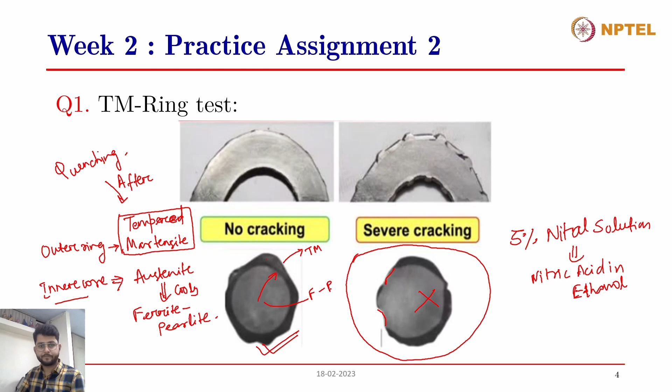While the rebar on the left has a completely circular cross section of the ferrite pearlite core, and the tempered martensite ring outside the ferrite pearlite core is more or less uniform. So this is a good rebar, and this is what essentially is done by the quality assessment.

Now, apart from this, before the TM ring test, another test is done - that is the bending test.

So both of these tests have to be done in combination in order to check the rebar's quality. In the bending test, shown in the top part of this picture, the rebar is bent, and as you can see in the left rebar, due to the bending process, there are no surface cracks at the tensile, or longitudinally stressed location, at the topmost fibers. There is no surface cracking due to the bending.

While in this second case of rebars, there are surface cracks appearing due to the bending, and these surface cracks will promote the corrosion process. So this severe cracking that is happening in the rebar will also let us know about the quality of the rebar.

So, to avoid any kind of corrosion, we know that there should be uniformity all around the rebar, and there should not be any inhomogeneity present on the surface of the rebar, so as to make a potential difference large enough to promote the corrosion process. So if it is uniform throughout, like in this case, then it is good quality rebar, and it will protect the structure from corrosion.

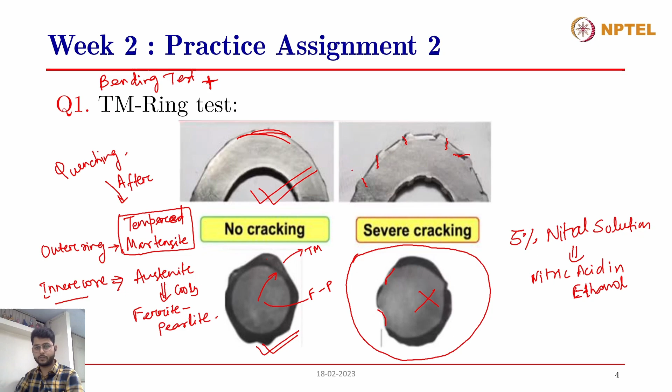So the answer to this question was, as rightly pointed out by Dr. Satish, the distribution of the tempered martensite and ferrite-pearlite core phases in the cross-section of steel can be checked by the TM ring test. The resistance against bending-induced surface cracking of the steel can also be checked. This has to be done after the bending test is done.

Bending test plus TM ring test. And effectively, the corrosion resistance of the steel is also assessed qualitatively by this test. It has nothing to do with the bond strength of the steel, and nothing to do with the tensile strength of the steel.

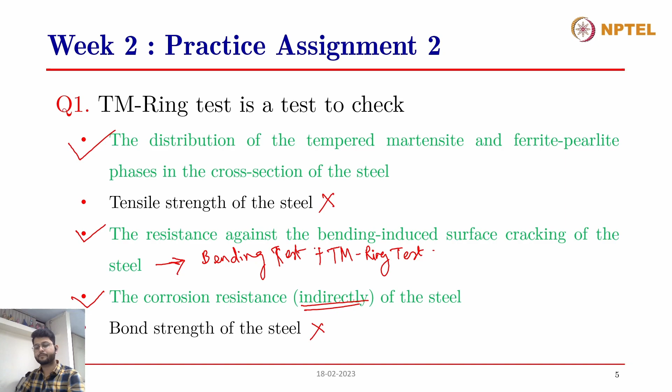Can somebody answer this question? I know the answer, but somebody else should try. Okay, Arvind, Manisha, Arvind has joined. Let them. Yes, Arvind or Manisha. If any of you want to answer this question, please raise your hands. In fact, I'll unmute all your mics since there isn't much noise and you're muted. Since nobody else is attempting it, Dr. Satish, go ahead.

First one: they are manufactured by cold working at a temperature below the recrystallization temperature of steel. Then, the twisting process does not increase the corrosion resistance, rather it decreases it. IIT Madras Professor Pillai has done some studies on this, because more energy is involved, and the moment you add more energy, it becomes more prone to corrosion. Third answer: the yield strength of the rebars increases with amount of cold working - yes, it increases, this is also correct. The ductility of rebars increases - no, as the strength increases, ductility comes down. And the last one: cold working results in strain hardening - yes, that's correct, because the process itself is based on strain hardening. Thank you, Dr. Satish.

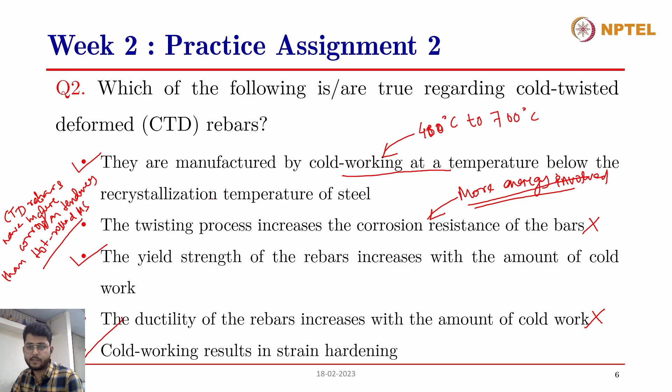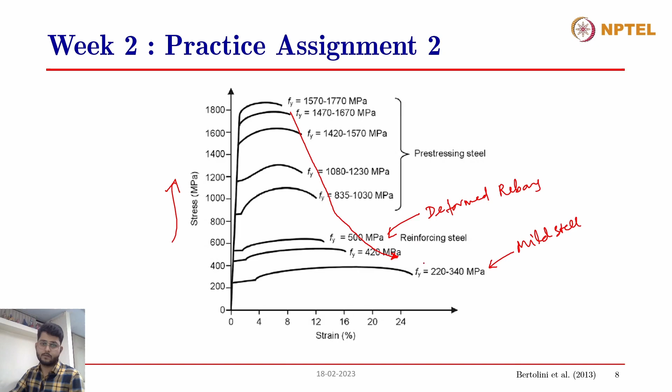Okay, the last statement was cold working results in strain hardening, which is again true. As Dr. Satish has highlighted, the cold working process is done so as to increase the strain hardening phenomena in the steel.

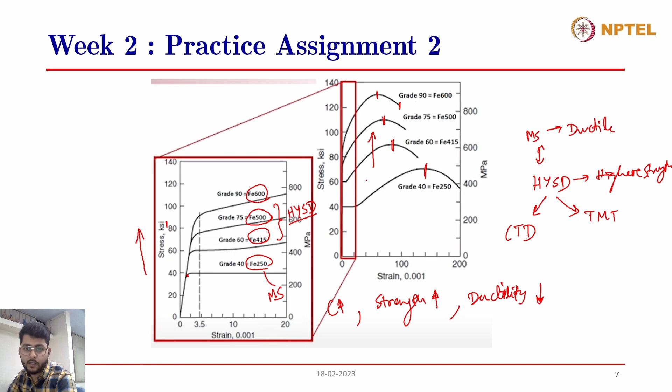As you can see in the case of mild steel, the strain hardening is lesser compared to HYSD in this graph. The slope after the yield plateau has crossed, the slope of the deformation curve of the steel rebar, is steeper in the case of HYSD rebars compared to mild steel. This steeper slope indicates that the strain hardening phenomena takes place in a much more highlighted manner than in the case of mild steel rebars.

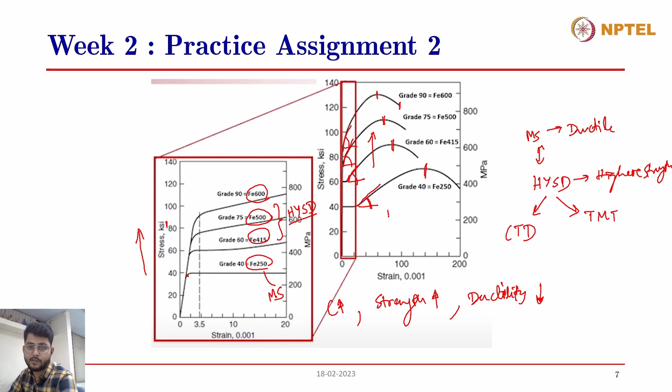All right, so these are the answers to the question. Coming to the third question: as per the lecture, the chloride threshold of bare steel is higher than that of galvanized steel with no surface damage. True or false? Can somebody answer this question? Mr. Ismail Ali Ahamed has joined, I think he can attempt. Okay, well, wait, if somebody wants to answer the question, please raise your hands.

Should I reply? Ismail has unmuted himself. Yeah, do you want to answer, Satish? Better? Yes, yes, better.

The question is: the chloride threshold of bare steel is higher than that of galvanized steel with no surface damage. Is it a true or false statement? The chloride threshold of bare steel is higher than galvanized steel.

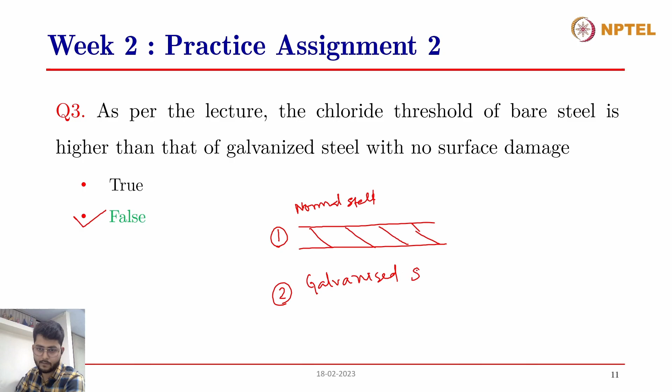So essentially, let's consider one example of this. This is a normal steel, and this is a galvanized steel. In the case of normal steel, it only has a depassivating layer or film around it, which is made up of the initial corrosion products of the steel reinforcement itself, the oxides and hydroxides of iron.

So this is the depassivating film of the reinforcement. Now, in the case of galvanized steel, what is done industrially is that the steel is placed in a zinc bath so as to prepare an alloy of the zinc and the iron from the steel as a coating over the steel surface. So the steel is intact inside, but there is a coating of the zinc-iron alloy over the steel.

And this coating has a higher thickness than that of the depassivating film of the normal steel. And as we know, zinc is more reactive than iron, so even this zinc also produces a depassivating layer around it, which, when it comes in the concrete matrix in contact with the pore solution of the concrete, again produces a depassivating layer around itself.

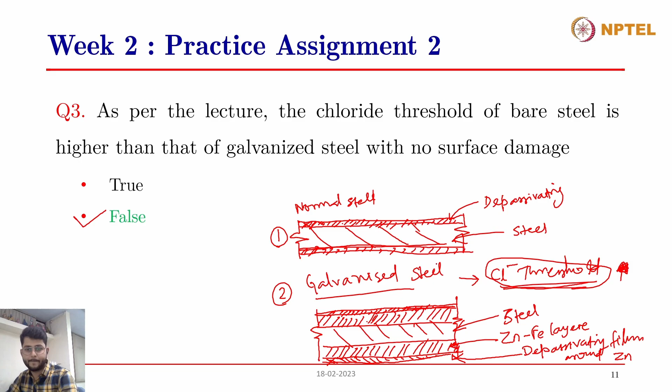All right, moving on to the fourth question. Choose the correct statement regarding galvanized steel rebars. They have high abrasion resistance compared to fusion bonded epoxy coated rebars. The zinc corrosion products are more voluminous than iron or steel corrosion products. The zinc coating can provide some level of galvanic protection even in the case of some scratches on the coating.

And I had also highlighted this in the last slide, even if there is some surface damage. Galvanized steel will corrode at the pH of carbonated concrete, say about 9. Addition of chromates to the coating can prevent hydrogen evolution and enhance the bond strength. Which of these statements are correct?

Can somebody answer this question? I think Mr. Ismail Ali can try. Yes, Dr. Satish. If Ismail wants to answer, you can raise your hand, or I have also allowed your mic. You can unmute yourself and speak.

Correct answer. So this one: galvanized steel will corrode at the pH of carbonated concrete, say about 9. That is an incorrect statement.

Now coming to the first one - they have high abrasion resistance compared to fusion bonded epoxy. Yes, this is correct because fusion bonded epoxy coated bars have sensitivity towards abrasion, so those are poor resistance. Galvanizing provides much better abrasion resistance as seen in practice.

The second one - the corrosion products are more voluminous. Answer is this is incorrect. And why? In case of iron or steel corrosion, there's a tremendous increase in volume, whereas in case of zinc corrosion products, it may be negligible, may not be much.

The third one is zinc coating can provide some level of galvanic protection even in case of some scratches. Yes, even if it is damaged, still it will continue to provide protection, whereas in case of fusion bonded epoxy bars, if you have pinholes, it becomes even more prone to attack. That is a problem with fusion bonded bars, so galvanic protection is better if some damage takes place.

Then the next question is galvanized steel will corrode at pH. No, it will not - normal steel will corrode. In case of GI steel, we have some protection. And then chromates as admixtures can prevent the hydrogen evolution, so that will be helpful. So the last one is also correct.

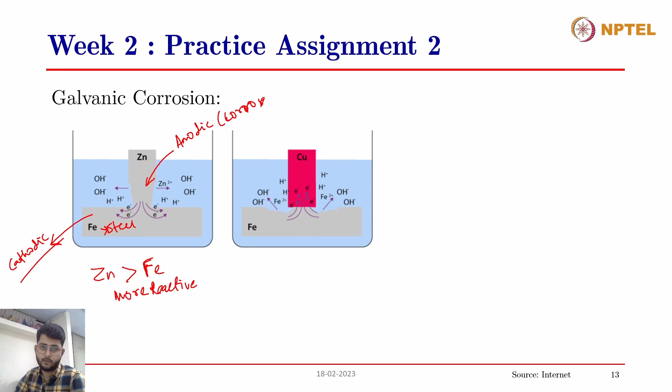It is a sacrificial action. Yes, zinc sacrifices itself in order to protect steel, it sacrifices itself. Right, right, Dr. Satish, thank you.

So this is kind of a sacrificial action, as Dr. Satish mentioned. The zinc gets corroded while the steel is protected, even if there are surface scratches on the steel. Let's say this is the steel, and this is the zinc layer.

If there is a zinc layer and there's a steel, so even if there are surface scratches on the steel, still due to the galvanic protection or this galvanic corrosion process, the zinc will keep on corroding. Even if there is a small amount of zinc present at that location over the steel reinforcement, that zinc will corrode before the steel gets affected. So this is the galvanic protection that is being talked about in this statement.

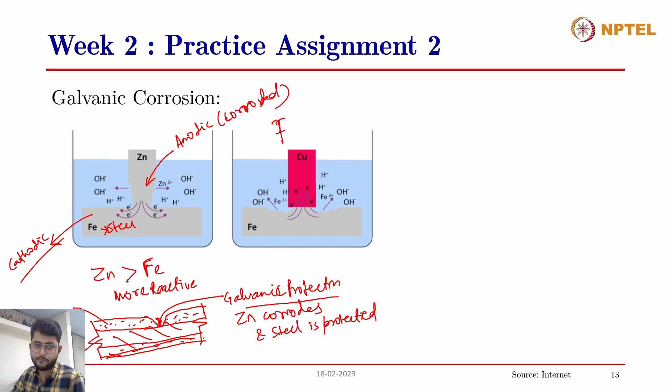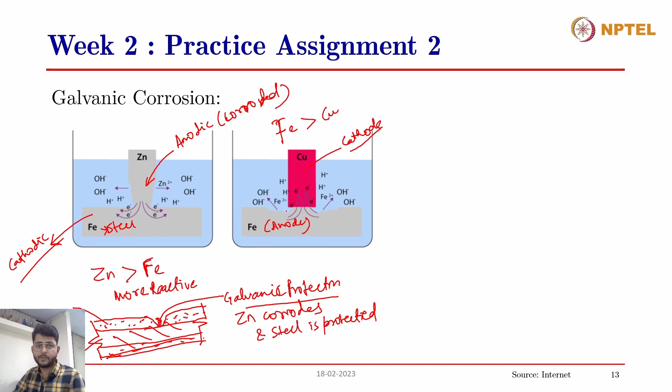Zinc corrodes and steel is protected. Coming to the right hand side image, which shows two different metals, copper and iron. In this case, iron is more reactive than copper, and therefore the iron becomes the anodic site and the copper becomes the cathodic site. Therefore, the copper is protected while the iron gets corroded. This has happened in a real life example in the case of the Statue of Liberty.

In the 1980s, it was investigated that the outside material of the Statue of Liberty, which is provided for aesthetic reasons, is made of copper.

So this is the copper, and the inside material is wrought iron, which provides structural support, acting like a structural steel kind of system. It is integrated with the outside copper covering with the help of these copper saddles.

At these locations, as you can see, the iron gets corroded and deposited while the copper remains intact. Once the iron is corroded beyond acceptable limits, it will affect the structural performance of the statue. So this is the problem of galvanic corrosion in real life structures that you might come across.

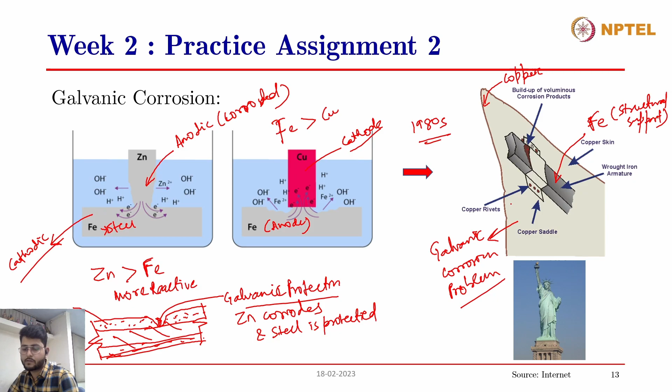So this was regarding galvanic protection. The fourth statement mentions that galvanized steel will corrode at a pH of carbonated concrete, say about 9. This is a wrong statement because, as seen in the lecture, of the passivation process of zinc.

Whenever zinc is present, the galvanized steel rebar is present inside the concrete at a pH of around 12 to 13, the zinc around the steel rebar forms this passivating film, as I have already explained. This passivating film is made of calcium hydrozincate, or CHZ, which reacts with the pore solution and forms this passivating film.

This is the initial corrosion product of the zinc, which acts as a passivating film around the zinc of the galvanized steel rebar. These corrosion products, up to a pH of about 13.3, can form a compact passivating film around the rebar.

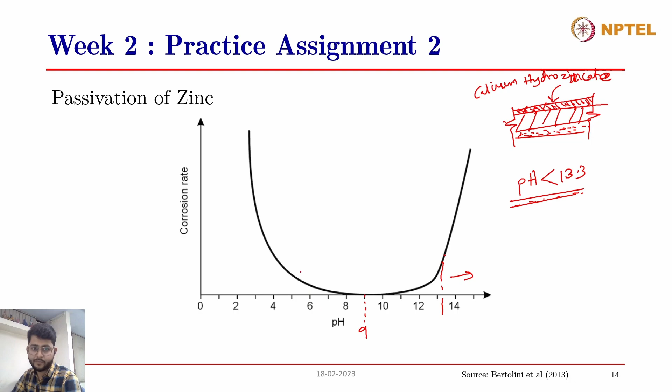But what happens at lower pH? As you can see, even at a pH of 9, the corrosion rate in the case of zinc is very low, even at the lowest point. While normal steel can start corroding below a pH of about 9, the zinc layer over the steel can go below a pH of 8 or even 7. So this is the wrong statement, that galvanized steel will corrode at a pH of carbonated concrete.

The last statement was that addition of chromates to the coating can prevent hydrogen evolution and enhance bond strength. As I already explained, at a pH beyond 13.3 there is hydrogen evolution and loss of bond strength, so addition of chromates is a measure to get rid of this loss of bond strength.

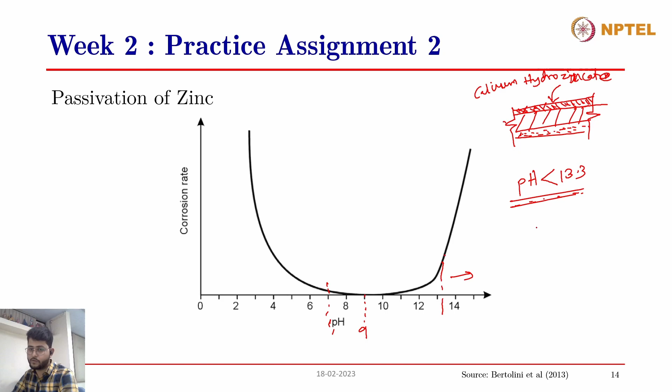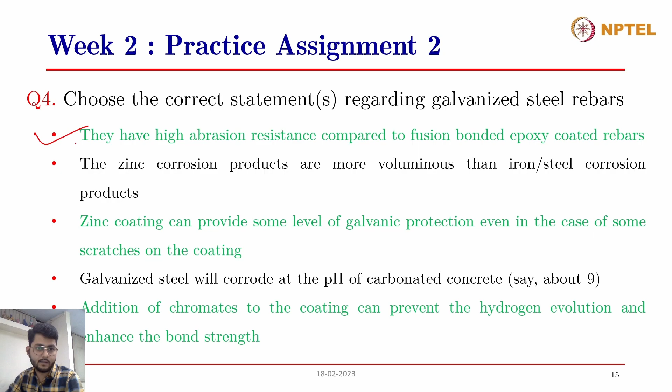Moving to question number 4: choose the correct statement regarding galvanized steel. Oh sorry, this is the answer, we have already discussed this question. So these are the three answers to this question.

Moving on to question number 5: exposure of fusion bonded epoxy coated rebars to sunlight with high UV index, typical in many countries, for just a few weeks can result in microcracking of the epoxy coating followed by underfilm corrosion, even without the presence of chlorides. True or false? Can somebody answer this question?

Let Mr. Ismail try. Anyway, you are going to explain the full details, you can go ahead. Anybody who wants to try it and explain, you can raise your hands. Anybody who wants to answer this question can raise their hands. Miss Vaishnavi has joined, she can try. Should I attempt? Wait, Dr. Satish. Yes, since nobody else wants to attempt, you can go ahead.

These fusion bonded epoxy coated rebars are very sensitive to ultraviolet radiation, and microcracking generally happens even if exposure is for a very small period of time. This can result in microcracking, and there can be underfilm corrosion because chlorides is one of the factors. Even without chlorides, if microcracking takes place on the surface, corrosion can still take place. So this statement is true.

And can you also tell me what kind of corrosion is referred to here as underfilm corrosion? I think crevice corrosion. Yes, right, thank you Dr. Satish. So last time also we had discussed this.

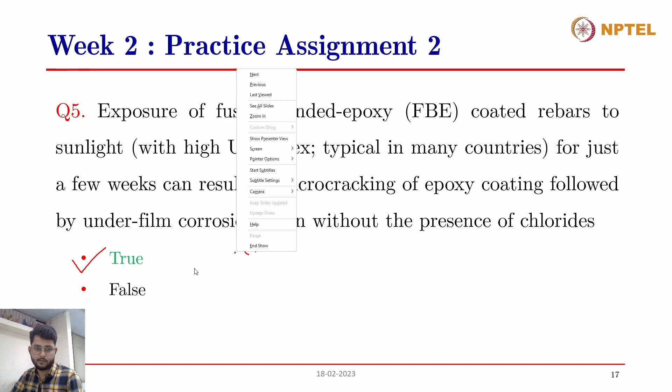Last time we had discussed regarding crevice corrosion. First of all, whenever these epoxy coated, fusion bonded epoxy coated rebars are exposed to direct sunlight, the UV radiation from the sunlight causes micro cracking of this epoxy coating, and this coating becomes brittle. Since this micro cracking will expose the steel covered inside the epoxy coating, that will accelerate the corrosion process.

Even if there is no presence of chlorides, we had discussed about the crevice kind of corrosion. Due to the non-uniformity over the surface, anodic and cathodic sites will be produced on the steel surface, and that will promote the crevice kind of corrosion, which will deepen at that particular location.

So this is the underfilm corrosion. Even if there is an epoxy coating, but if it has surface micro cracks, it will accelerate the corrosion process even without the presence of chlorides. So this is a true statement, and this underfilm corrosion is the crevice corrosion.

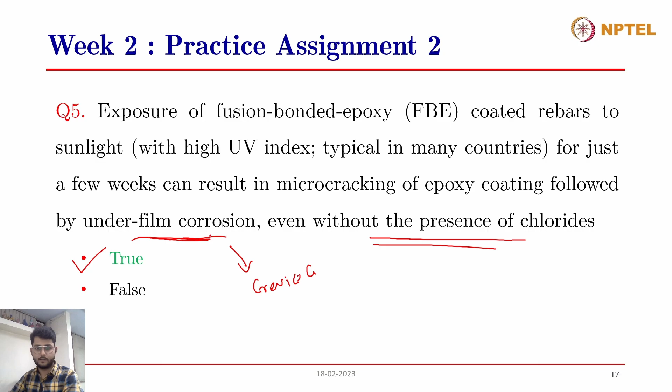All right, Dr. Satish, go ahead. We have to choose the wrong statement regarding the corrosion mechanism, and the protective system is cement polymer composite, which protects the steel rebar. Now it has been applied on a sandblasted surface, so obviously there's good sticking power, and it appears to be a good system. So the coating helps in reduction of oxygen supply - yes, it acts as a barrier. Now we have to choose the wrong answer, so this is correct.

The coating acts as a sacrificial layer for the steel - no, this is wrong, because it protects; it's not like a layer of zinc which acts as a sacrificial layer. This is different - it will protect, it will not sacrifice itself. Now the third one: the coating helps in the formation of a thin passive film on the steel surface - yes, obviously correct. Then, the coating eliminates direct physical contact - yes, that is also correct.

Should not be applied on a rusted steel surface - right, yeah, okay. Thank you, Dr. Satish.

As he has already mentioned, the cement polymer composite essentially means that cement is mixed with the polymer to produce a composite. The polymer could be epoxy or some other kind of polymer, and this cement is mixed with that, and this cement polymer composite is applied as a coating over the steel rebars. When the coating is applied on a sandblasted steel surface, the sandblasting is done in order to increase and enhance the bond between the polymer composite and the steel surface. So this coating protects the rebar by two actions. The first action is, since cement is present, it increases the alkalinity around the steel rebar.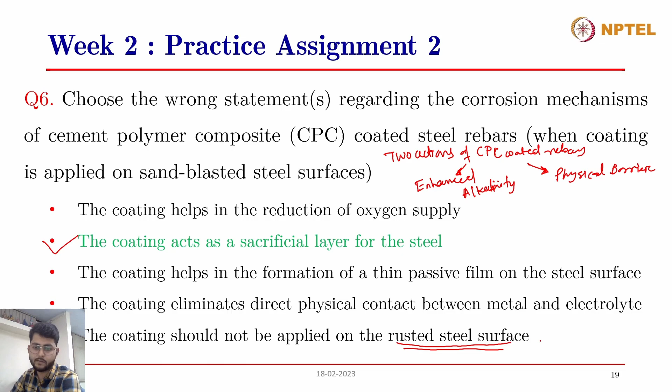The coating should not be applied on the rusted steel surface. This is true because if the steel is already rusted, even if you apply coating over it, once the rusting process has already started, it will continue because cathode and anodic sites are already present over the steel surface. Even if you block further contact with the electrolyte, oxygen, or moisture, it will still continue. So the coating should not be applied on a rusted steel surface. This is also a true statement.

Moving on to the seventh question. You're required to select the type of reinforcement to be used for the construction of a highway bridge in a remote coastal area where the average relative humidity is around 70 to 80%. The design service life of the structure is 110 years, so the design life is quite high. Based on the understanding from the lecture, select the most durable type of rebar from the options given below.

Also, sandblasting is not allowed, and the structure needs to be designed for ductility. So these are the things you have to keep in mind: sandblasting is not allowed, the structure has to be ductile, probably in an earthquake-prone region, the relative humidity is around 70 to 80%, and the life of the structure is quite high, around 110 years. Which of these rebars will you select? Cement polymer coated steel rebars, galvanized steel rebars, hot rolled mild steel rebars, or carbon fiber reinforced polymer rebars. Can somebody answer this question? It's a good question.

Cement polymer coated steel rebars will function properly only if you clean the surface properly, so since sandblasting is not allowed, cement polymer coated steel rebars will not work. Then galvanized steel rebars - yes, as came out in the lecture, their performance has been proven, so this is the best type of material for this situation. Then the third one, hot rolled mild steel rebars, will definitely corrode because it is a saline environment. And the last one is basically for strength, and again you require good sticking power, so unless you clean the surface properly it will not stick well and there will be delamination. So obviously galvanized steel rebar will provide the best protection in this type of situation. Okay, thank you.

Thank you, Dr. Satish. So we'll go on discussing one by one all the types of rebars and why we should not select them in this particular situation. The cement polymer coated steel rebars are good, but you have been told that sandblasting of the steel is not allowed. If sandblasting is not allowed, any kind of coating you provide over the steel will not have good bonding with the steel. So since sandblasting is not allowed, it's not a good idea to use CPC steel rebars - this is rejected.

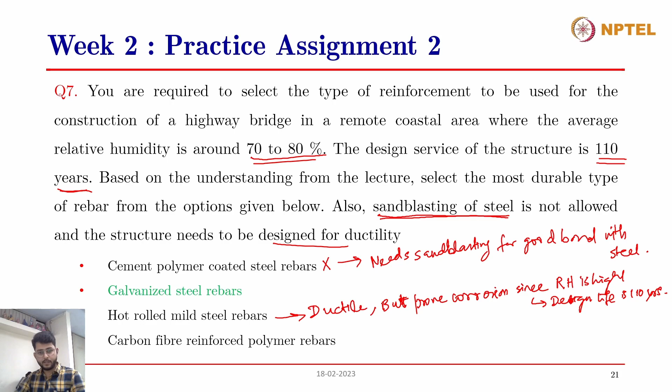Coming to the third one, the hot rolled mild steel rebars. The design service life of the structure is 110 years, and hot rolled mild steel rebars are ductile, so it is designed for ductility. But the relative humidity is very high, 70 to 80%, so it's prone to corrosion. These kinds of rebars are prone to corrosion since the RH is high and the design life is 110 years. So this will not work, even if it is the most economical option over here.

Most economical option. Again, carbon fiber reinforced polymer rebars - this is, among all four types of rebar that is mentioned. This is the costliest.

And again, it has a problem. Whenever the alkalinity increases, these kind of polymer rebars experience surface etching, and they are unstable in the alkaline environment. So carbon fiber reinforced polymer rebars will not be suitable for this high service life, high design life structure.

Also, these polymer rebars undergo debonding of the fibers, as well as there is shear failure within the rebar, as you might have seen also in the lecture. So if this is the rebar, there is kind of a shearing off at these certain locations on the rebar.

So these are brittle in nature. Since we have to design the structure for ductility, we can't use this. Also, these rebars sometimes undergo debonding of the fibers, and that creates a lot of problem because these rebars won't be functional structurally then. So this is discarded.

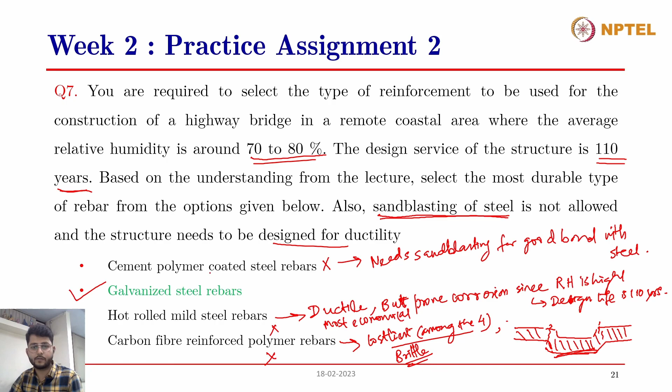Sandblasting is not required for galvanized steel rebars, as it undergoes a totally different chemical and industrial process, and the structure needs to be ductile. And yes, this galvanized steel rebar is ductile in nature. So galvanized steel rebars serve all the kinds of conditions that we have listed above, and therefore that is the answer.

Coming to the eighth question, which was the last question of this practice assignment: choose the correct statement or statements regarding the corrosion in post-tensioned concrete systems. The post-tensioned duct should not be filled with water before grouting. High bleed grouts can prevent the formation of voids in the duct. The end anchorage zone should be covered with cementitious coatings. The end anchorage zone should be covered with metallic or plastic caps for long-term protection against moisture attack. Which of this is correct?

In case of pre-stressed concrete system, post-tensioning is the case as stated in the question. The PT duct should not be filled with water before grouting because we are not very sure that all the water will be expelled out. So some water may remain and it will create problem of corrosion, particularly when high stress levels are involved. So this answer, the first one, is correct.

Then high bleed grouts can prevent the formation of voids - no, high bleed grouts are not desirable. Then the end anchorage zone should be covered with cementitious coatings - in contrast to cementitious coatings, as came out in the lecture, they suggested that the anchorage zone should be covered with metallic or plastic caps. And among these two, preferably metallic, was told by Professor Pillai. He says that plastic caps can also degrade because of exposure to ultraviolet radiation, etc. Metallic are still better. So the last one is also correct, and this one is wrong.

Thank you, Dr. Satish. Yes, the correct answers to this question are the first and the fourth statements. The post-tension duct should not be filled with water before grouting because if some of the water remains inside the duct, that will promote the corrosion process even after you grout it. If that water is present within the duct at any location, that will promote the corrosion process.

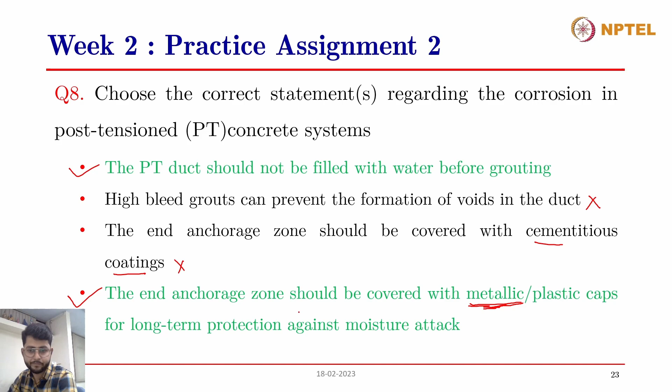As Dr. Satish has already mentioned, plastic caps have the chance of becoming brittle with exposure to sunlight, and they have the chance of cracking due to exposure to UV rays. Metallic caps can corrode, and special care needs to be taken so that they protect the steel inside from corrosion. So these two are the right answers.